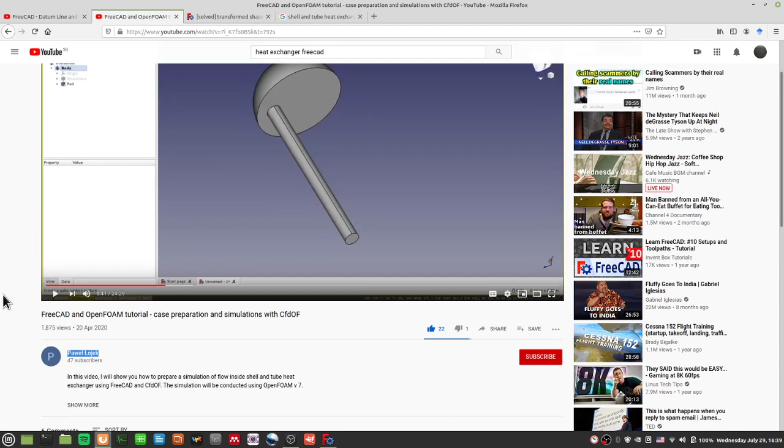Before I continue, I want to give credit to this guy called Paweł. He made a very good video about how to use FreeCAD with OpenFOAM 7 in the CfdOF workbench, which allows you to use a very limited version of OpenFOAM—7 or 8, the OpenFOAM alt version—with FreeCAD so you have a graphical user interface.

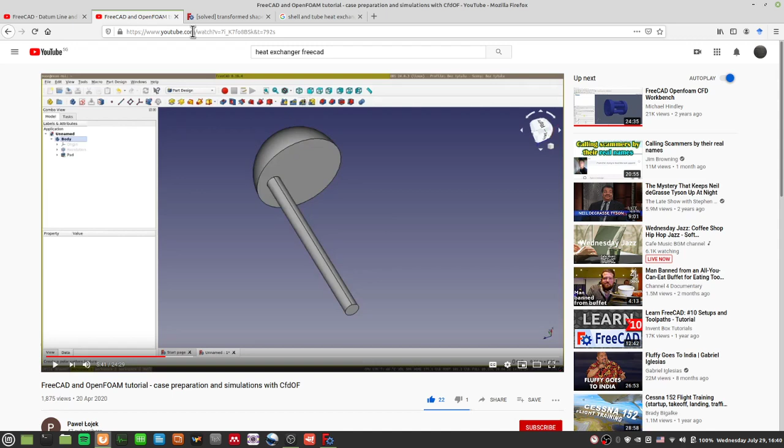But I'm not going to go through that, I don't have plans to, because first thing first, that version of OpenFOAM doesn't really encompass everything OpenFOAM can do. It's still better to learn how to natively work through OpenFOAM as it is and use ParaView, etc. So here are some videos I actually referenced.

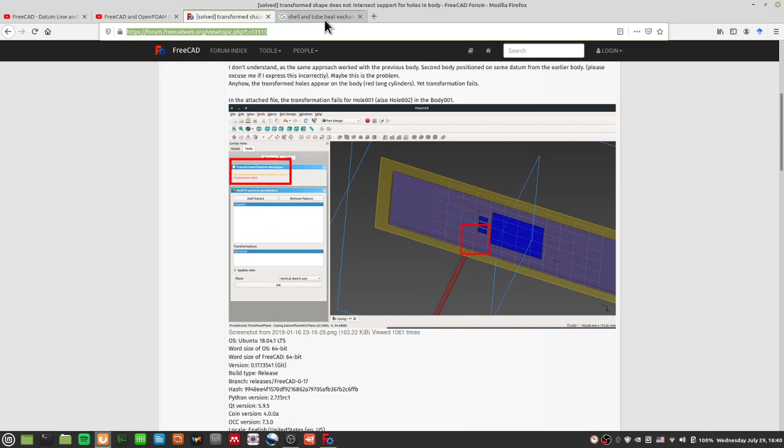There's a FreeCAD datum line and datum plane. There are lots of features I want to go through, so buckle your seatbelts because you're going to have a big dump of data if you're doing FreeCAD for the first time especially. Some of the forums I found very good help in for FreeCAD, especially when I run into issues like this—I'll paste it all in the links below, and you can also look at shell and tube heat exchanger design from Wikipedia.

So this is basically a very basic version of what we're trying to do. We're doing the tube side of the shell and tube heat exchanger. I didn't do everything because I'm not doing a multi-region simulation yet—I'm just doing the fluids bit, nothing else.

That's what we want to do, and today we want to talk about some tools which we can learn to use to begin to do this sort of shape. This is the completed version, or at least partially complete—the heat exchanger, the tube side.

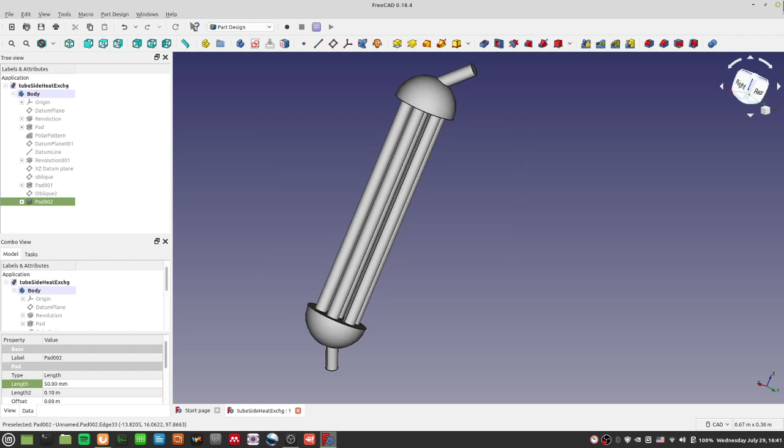So I'm going to save this as a copy, like tube side heat exchanger. But I'm going to close it and start from scratch. Let's run FreeCAD. So basically we are trying to learn to make a shape like that. Instead, I'm going to look at this—well, I'm going to delete everything and start from scratch.

That's where normally we would start—you roughly know what the end product should look like, it's a heat exchanger. So how do you start doing your heat exchanger? Well, you saw that there are two hemispheres, and then a network of pipes in the middle, with one pipe for the inlet and one for the outlet.

So we want to start doing our heat exchanger by learning how to draw hemispheres. Alright, so let's learn to draw some hemispheres. We go to the part design.

I know it's very overwhelming—FreeCAD can be very overwhelming, so just ignore everything else and go straight to part design, because we are going to design our parts. Go straight to doing create body—so we're going to create a new body and make it active.

Next thing we're going to do is double click this body. You click on this body here on the left hand panel under labels and attributes, under tree view. If you ever turn off your tree view by accident, go to view, go to panels, select tree view and combo view, in case you get lost, which is very common when starting out.

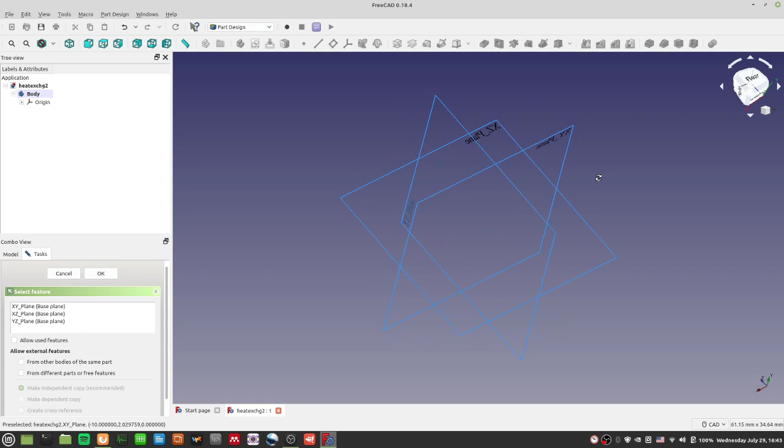So let's do the first thing first: create sketch. We want to create a sketch. Since this is a 3D object, I want to be very careful about where I start making the sketch. So where do I want to start? Well, my vertical direction—I want it to be either the Z or the Y direction.

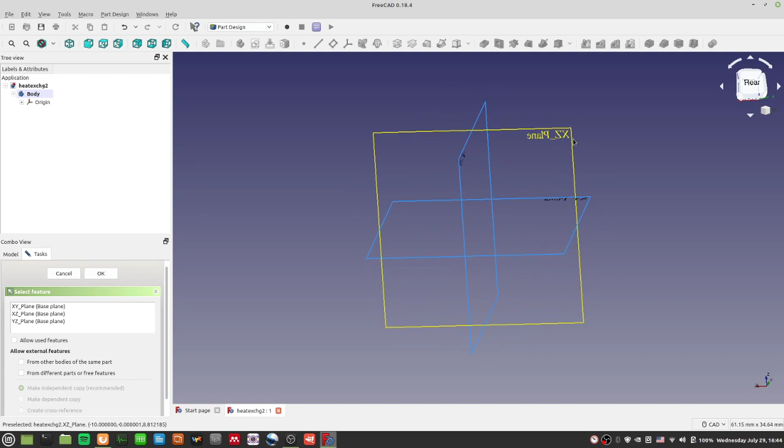Okay, so I will just choose the Y direction to be the vertical one. Since I'm making Y direction my vertical direction, I will take the XZ plane to start. So when we select that XZ plane, we are left with this.

Okay, so we want to start doing this hemisphere, and we'll be brought automatically to the sketcher tool. So first thing first, how do we do a hemisphere?

Well, a hemisphere is basically, we do a semicircle or a quarter circle, then we start to rotate it. If you learned integrals before, if you do calculus, we learn how to rotate a shape over 360 degrees, 180 degrees, to form a solid volume. And that's the basic thing of what we want to do here.

So there are two... hopefully you know your calculus well. If not, you can go and brush up. But if you're not too sure what's going on, okay, so first thing, we are making a semicircle.

Alright, we just want to make a semicircle, and then we rotate it, so that we can make a hemisphere, which is half of a sphere. Alright, so you will start with this grid, and you will see this little red dot in the center.

Okay, so how do you start drawing a hemisphere? You will need to start drawing a line first for the bottom of the hemisphere. Okay, so how do you draw a line?

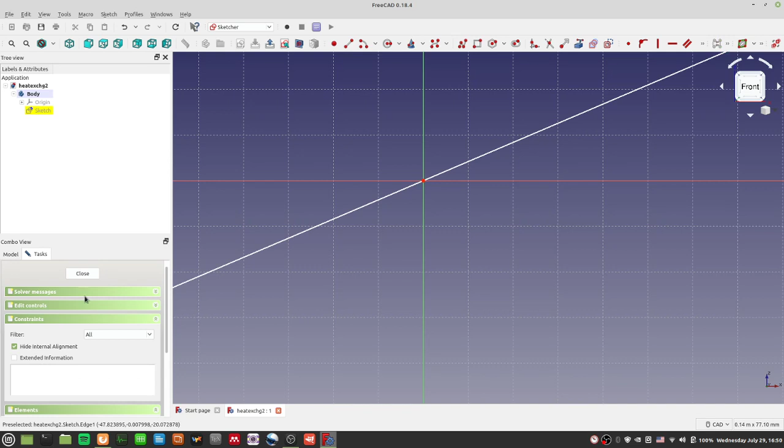The other way of doing it is you go to the combo view on the left hand side. If you're not sure where the combo view is or it's turned off, go to View and Panels, then Combo View. Under combo view you will have solver messages, edit controls, and constraints. Go to the constraints tab and press delete. When you delete that, you get rid of this constraint.

And I press escape. If you ever get to this view and want to edit your sketch again, just go to the tree view and double click sketch. You'll be editing your sketch again. So these are some of the basic ways to work around this.

Now the other way you can make constraints work for this line and point, the symmetry constraint in particular - you can select this line and select this point. Click this line and click this point, then put the symmetry constraint and it will automatically do it for you. So these are two ways of doing it, and you can just do Ctrl Z to undo any changes if you don't want them to stay.

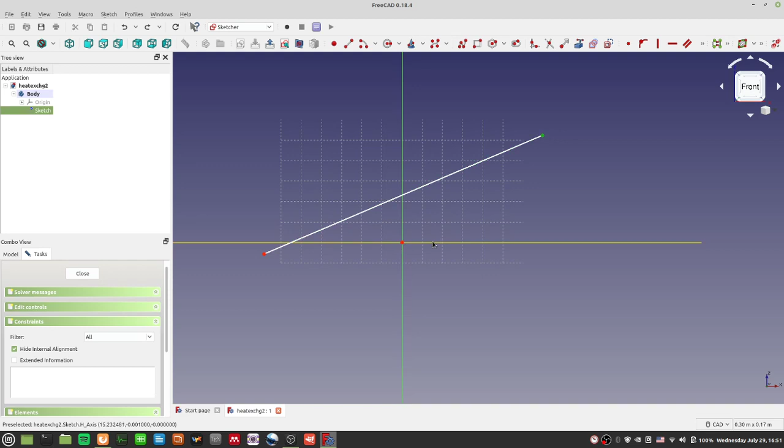If you want to select multiple points, you just press Ctrl and click. You will select them and they become green. So I'm going to do Ctrl and click, just for demonstration. It's pretty much the same effect, but sometimes Ctrl and click is better if you want to select multiple bodies or points. So I'm going to do a symmetry constraint. What does a symmetry constraint do? When I shift these points around, it will behave as such.

Next, I want to make this semicircle by making this line perpendicular to this line. Now there are two ways of doing it. One way is that I attach one of these points to this axis. I click this point and click this axis, both will be highlighted green, and I say fix a point onto an object. If I do that, this point will be fixed on this axis, and basically this line will become perpendicular to this line.

Again, if you're not happy with this, you can select this thing, click it, and press delete. It will get rid of this constraint and you're free to move again. So the other way is to use this perpendicular tool. Go to the same place where you find your symmetry constraint, click both of these lines, and select create a perpendicular constraint between two lines. What does it do? It makes sure that this line and this axis is perpendicular.

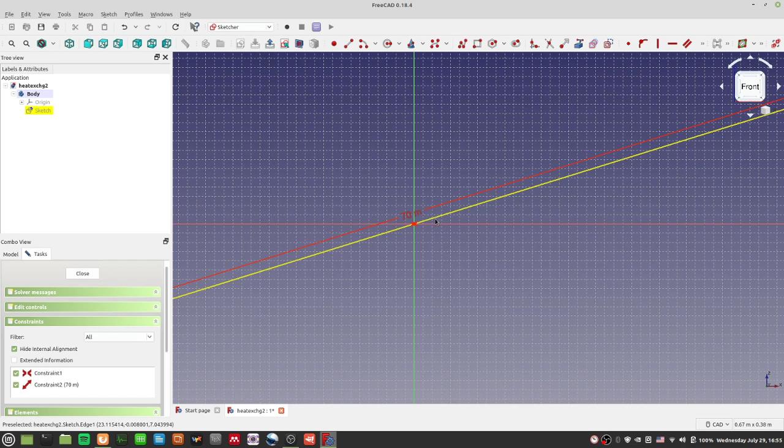How are you supposed to do it? It'll be a lot harder if you want to use this fixed horizontal distance between two points or line ends, so you don't want to do that. This will be a better way, and I want to make it 70 mm. Oh wow, that's 70 meters. If you don't like it, double click that 70, and now this thing is 70 mm, and I can shift it around as I please. That's basically making a 70 mm long line.

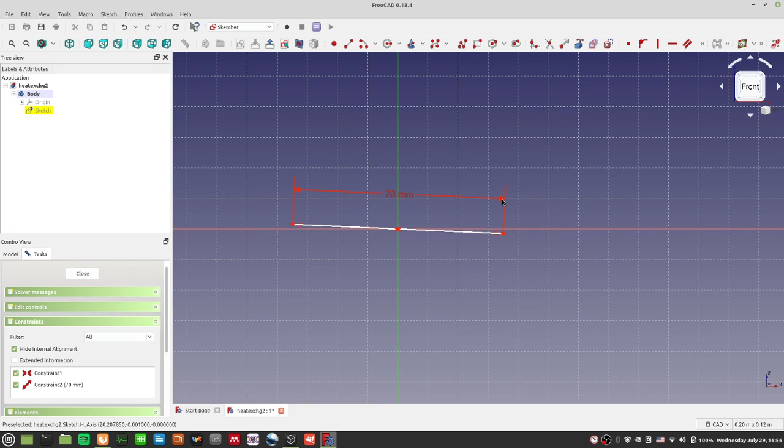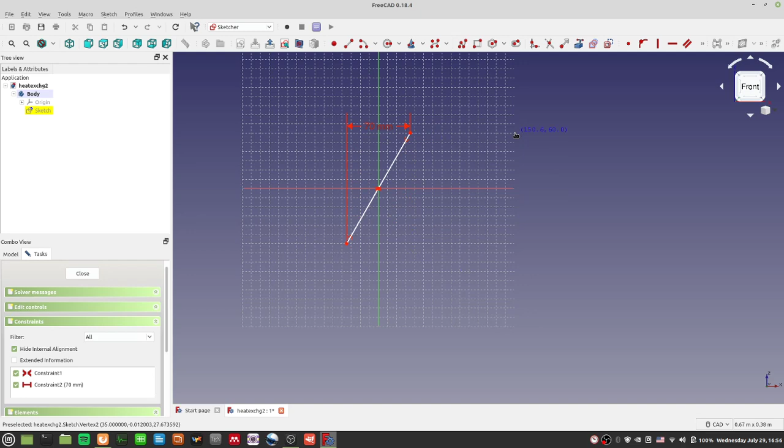Now I'll demonstrate what happens if we do it the other way around. Let's say I want to fix the horizontal distance and make that 70 mm. So that will do it this way. I'll be able to shift the actual length of the line up and down. This is the horizontal distance being fixed, but I can still shift it up and down like this, and that's not exactly what I intend to do. If you want to do something like that, sure, but that's not the aim of this.

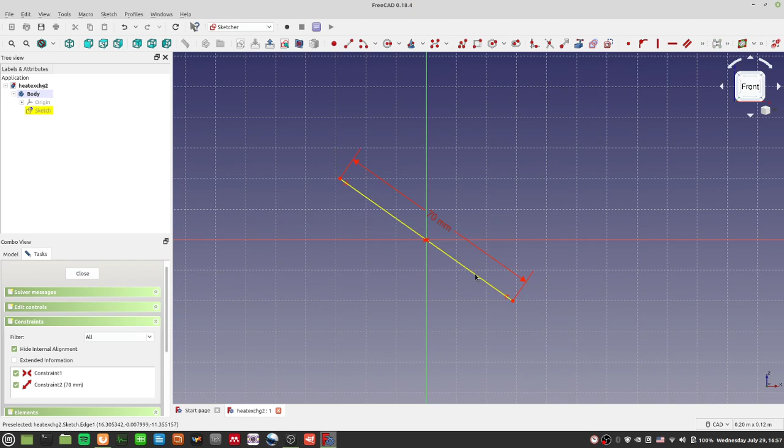And of course, equivalently, you can do it for the vertical distance as well, which is over here, but I'm not going to do it because it's pretty straightforward. So 70 mm is here, and then I want to make these two lines perpendicular.

Once you have fixed this line completely, meaning this line is fixed in space, fixed in length, fixed in orientation and positioning, everything, it will turn into this light green color. A light green color means that this line is fully constrained. It is fixed there, you can't move it. That's what it means to have a fully constrained sketch.

Now, this is one way of doing things. But in the course of your drawing lines and everything, you might run into some funny situations. For example, you will run into this thing called redundant constraints. Let me give you an example. Let's say this point is fixed to this line, that's 1. This point is also fixed to this line, that's 2.

And then I want to make this line perpendicular, and I want to make this distance 70. Let me go again. I want to make this distance here 70 mm, and I can't, because now both of these are actually stuck there.